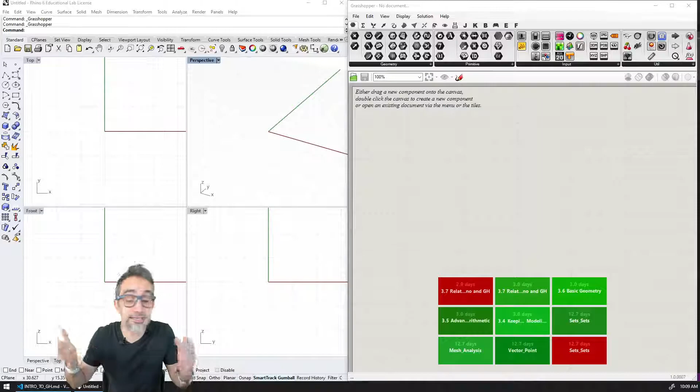Salvador, good morning. And Sotivas, yes, we're continuing with the introduction to parametric modeling series.

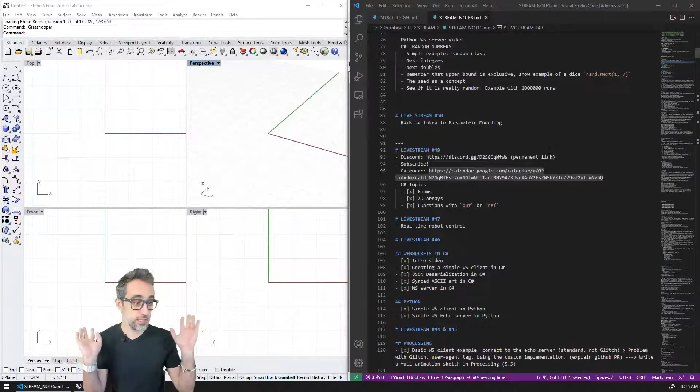Alrighty. And is that a good description, Nono? What do you think about that? I hope I didn't misrepresent anything.

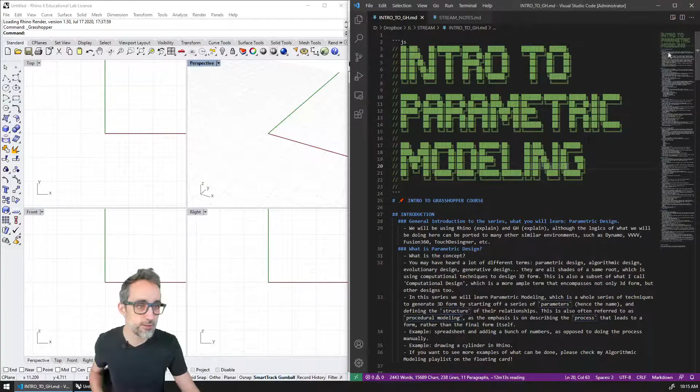Anyway, where were we? Yes, today, what are we doing? We are continuing with the Introduction to Parametric Modeling playlist. And I had a list of things that I wanted to cover here. So I think today we're going to start with Introduction to NURBS Geometry. How are we going to do that? That's a really good question.

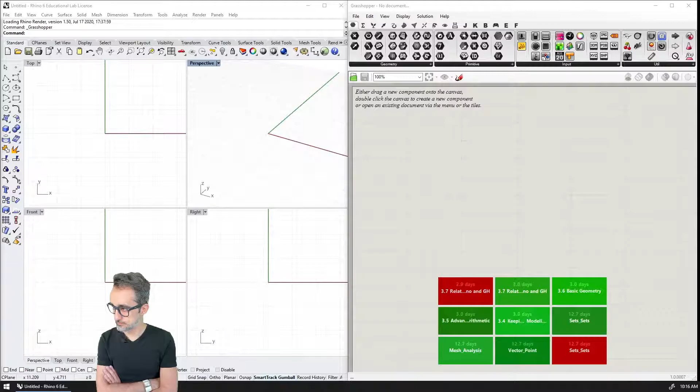Okay, so yes. So today we're going to do 2 live streams, one in the morning, one in the afternoon, and the one in the morning, we're going to touch upon NURBS geometry. So I'm going to be explaining what NURBS geometry is, how it works, the basic properties of things that you need to keep in mind. And then we're going to do a few exercises with lines and polylines and splines and blah, blah.

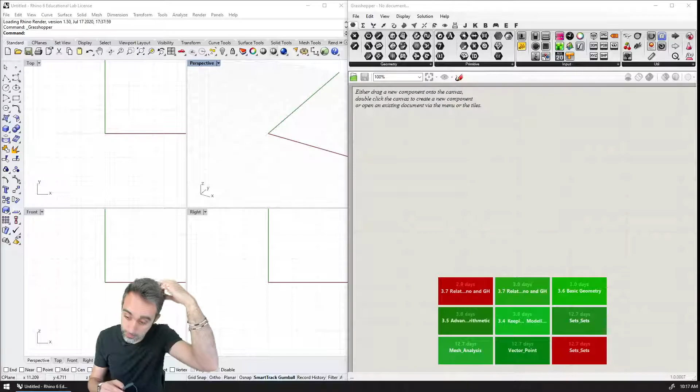We're going to discuss how to import geometry from Rhino into Grasshopper, which is something that we haven't seen yet. And then hopefully, if we have time, we will end up with NURBS surfaces this morning. But if we don't, then we will do that in the afternoon. So remember, we're streaming at 2 p.m. again today, 2 p.m. my time, so East Coast in the US. And in the afternoon, we're going to be doing a bunch of practical exercises.

All right. How does that sound? Does that sound like a plan? Are you excited? Can you give me a hands up? Choo-choo, choo-choo. Yes, I should not be drinking so much coffee before I do these things, because then things happen.

Okay, so NURBS geometry. What do I want to say about NURBS geometry? Well, I'm going to do some sketching here. So I will draw some stuff and I will explain things. But I probably want to start first by explaining or showing what NURBS geometry is. What are NURBS? Control points. Maybe this could be interesting. Wikipedia.

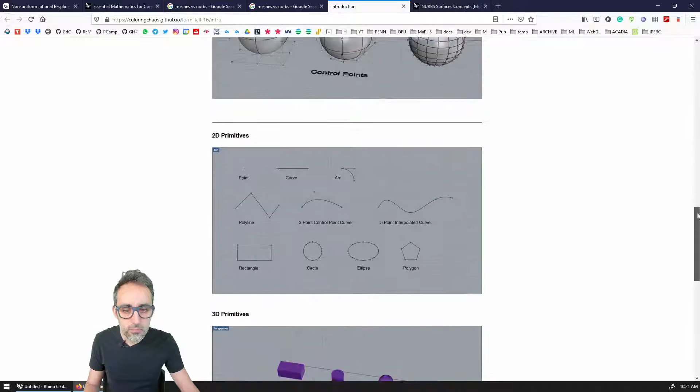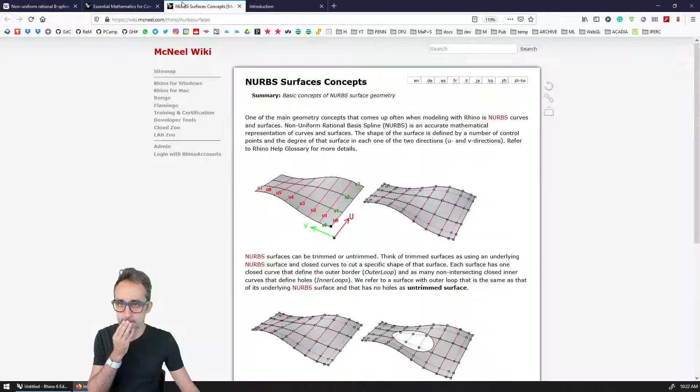Okay, so I think we can start this video. My first one is a little more theoretical, so it might be a little bumpy as we record this. I'm going to start with NURBS. Actually, this is a pretty nice drawing. I can probably use these drawings when I explain things. Meshes versus NURBS. NURBS surfaces concepts. I can probably show that later. Sorry I'm ranting a little bit, but I want to think this through before I start recording. Okay, let's just start.

Hi, this is Jose Luis, and welcome to this new video. No, let's start over again. Welcome to this new section in the playlist, the Introduction to Parametric Modeling series. Should I explain first as opposed to other forms of geometry, or Euclidean geometry? Let's just do it. Let's move on.

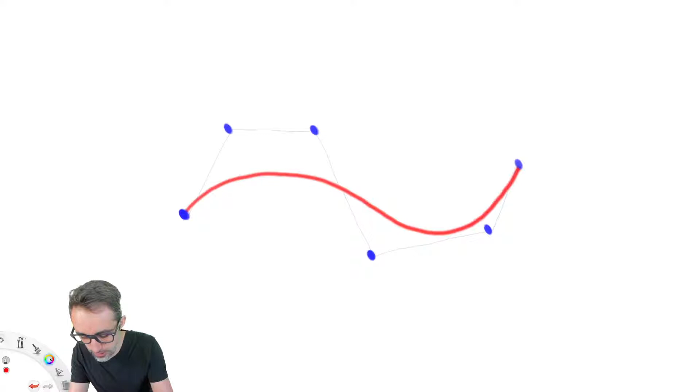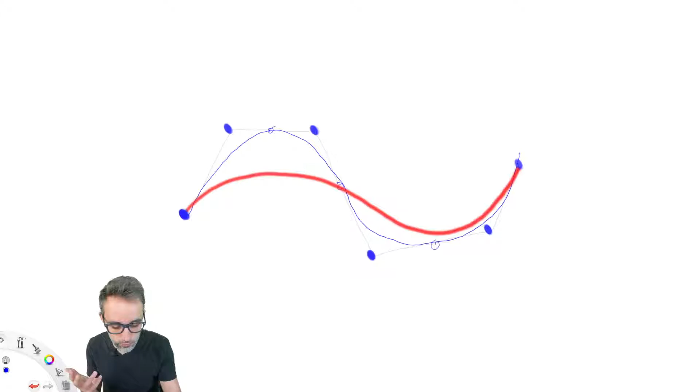And the degree of the curve gives us a representation of how smoothly that curve is going to travel through the control points. What it means in practical terms is, imagine I have this curve and this curve is degree 3. If I were to change the degree of this curve and make it degree 2, then we will have a curve that will snap closer to the control polygon, something like I have drawn there. And actually, because it's degree 2, each one of the segments will be tangent here to the control polygon, something that did not happen with degree 3. And each one of the segments will be a quadratic curve, basically degree 2.

Now, if we reduce the degree one more level and we have a NURBS curve of degree 1, it turns out that all the segments are polynomials of degree 1. And which geometry can be represented with a polynomial of degree 1? Well, it turns out that is straight lines. So a NURBS curve of degree 1 is basically a polyline. It's something that looks like this. All right? So the lower the degree of the curve, the closer or the more bound the curve is to the control polygon.

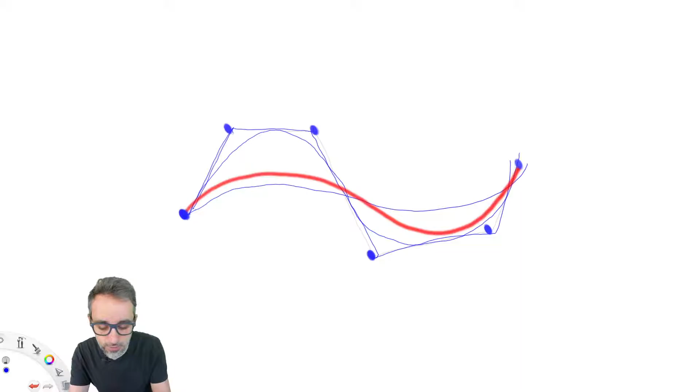Whereas the opposite is also true. If we have the red curve, which is degree 3, and then we increase the degree, then the curve will travel even more smoothly throughout the points. So a degree 4 curve might be something like this, and degree 5 would be even smoother, maybe something like this. Okay? So, as we will see very soon, if you want to play with the degree of a curve, the higher the degree, the smoother it will go through the control polygon.

You have to remember, though, that one of the rules of NURBS geometry is that you need one more control point than the degree of the curve. So if you want a curve of degree 5, you will need to have at least 6 control points in your curve. Otherwise, you just cannot generate that.

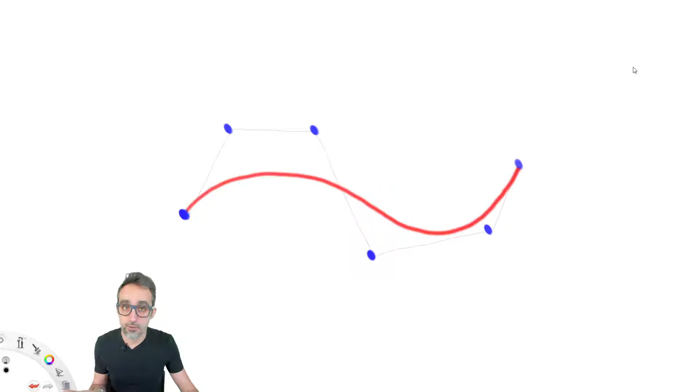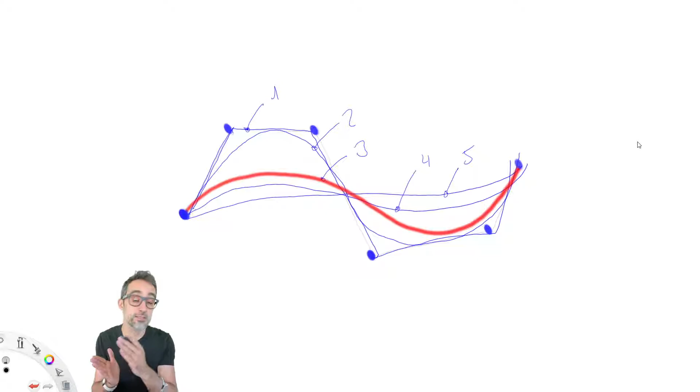And the last property of NURBS geometry I'd like to discuss, which is extremely important, is the domain of a curve and the idea of finding parameters, finding points across the domain of that curve. What does that mean? Let me turn off all these different degree curves, and let's stick with the main one we had, which was of degree 3.

What that means is, as I was explaining before, there is some kind of polynomial that the software is handling for us somewhere, which looks something like that. It depends on an unknown variable, in this case I've called it t, and yes those things are t's, my t's are a little special. It also has some other coefficients, a, b, c, and d, which are numbers we know because of the control points. So the control points define which coefficients we have in that polynomial. That equation, that polynomial, is the one that drives the shape of the curve, more or less. This is not exactly like that, but more or less.

The unknown parameter t is the one that defines where along the curve we can position ourselves. Because the only thing we don't know there is t, if we start plugging in values to the parameter t, for example 0, 0.5, 0.8, 1, 1.5, 2, whatever, and solve the equation, we can find the coordinates of a point along a particular length of the curve.

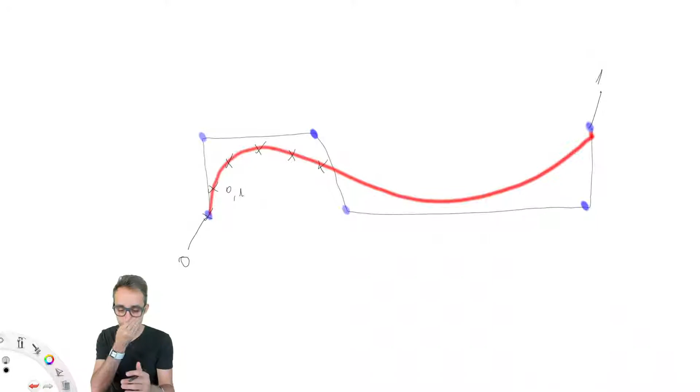Whereas if we keep going and ask the curve for a point at parameter 0.6, those points may start spreading out and getting farther from each other, as if accelerating over the curve. So this could be 0.5, this could be 0.6, this might be 0.7, 0.8, 0.9, and this would be 1.

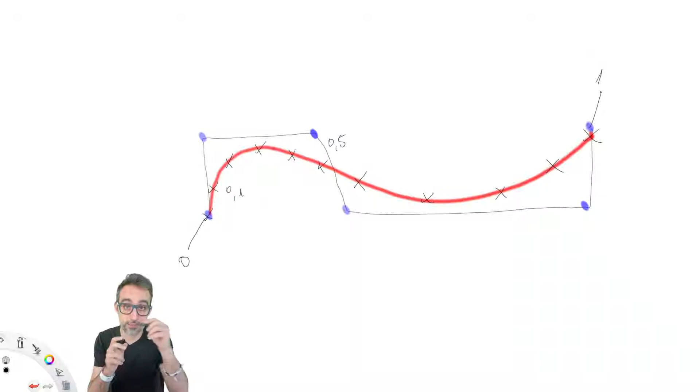So the bottom line is that the domain of a curve is not evenly distributed in Euclidean terms. The linear distance between those points—the chord segment or length of the curve—is not going to be the same, even though the distance in parameter space between them is the same. You can think of the domain as a number representing where we are along the curve, but it's not linearly dependent on the curve, and it has nothing to do with the actual length of the curve. It has to do with the distribution of the control points.

All of this will be a bit more clear in the next videos when I start showing examples of how this works.

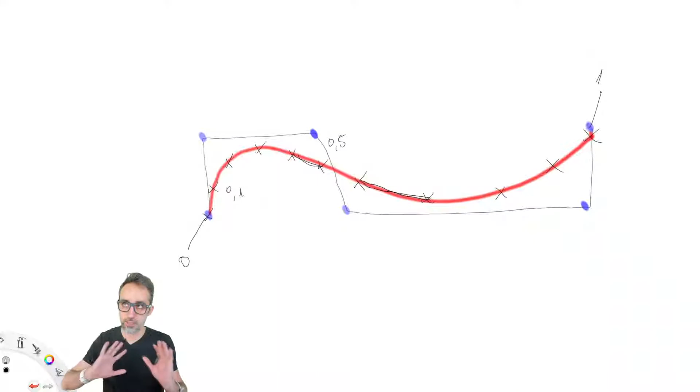Okay, I did like that one. So let's go back to what are we doing now? Control points, the domain, and the degree. So I have that, and I'm going to save this. Curves have knots and other properties, but I don't think they are very interesting myself, which might be a strong judgment call on my side, but I'm going to stick to that.

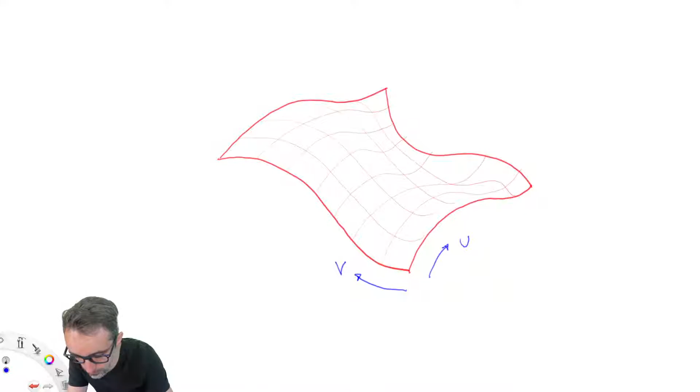Okay, so I'm going to do this. So that's going to be a surface, and I'm going to say this is going to be the direction. This is going to be direction U. This is going to be direction V. So any point can be represented, and if we do this with lines, we can also divide this in a way, kind of like that. So I can draw a point anywhere on the surface, like that. Okay.

Now, NURBS geometry has a few other properties, such as knots and other things that are perhaps a little less intuitive. For the purpose of modeling, I consider that they're not so interesting, so I'm going to skip over them to move on to other kinds of NURBS geometry that is not just curves, but surfaces. The idea is that all the properties and concepts I just explained for curves apply exactly the same to surfaces. It's just that instead of having one polynomial that defines the curve, I have two polynomials that define the curvature of the surface in each one of the directions.

So what does that mean? It means that when I have a NURBS surface, first of all, I have a cloud of control polygons like this, which define the overall curvature of the surface in both directions. What that also means is that I have two directions. Just like with curves, where I had one direction defined by the curve, typically referred to as t, for surfaces, the internal direction is referred to as the u direction, that's one, and the v direction is the other one.

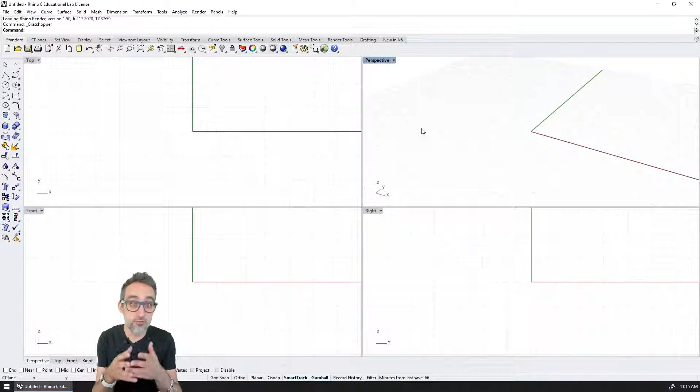Hi, this is Jose Luis, and in my previous video in this series called Introduction to Parametric Modeling, I explained conceptually why NURBS geometry is so interesting and what are the main properties that drive it. So in this video, I just wanted to do a few quick examples of how we can actually model in a 3D modeling environment with non-NURBS geometry and with NURBS geometry.

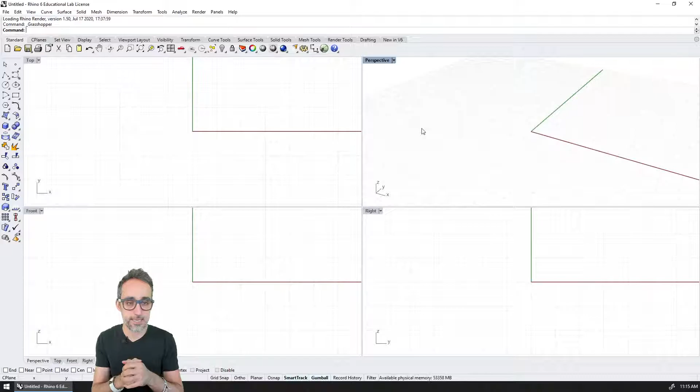So here I have my Rhino viewport. Rhino is a 3D modeling environment that is very popular among product designers, sometimes in architecture, and it is very well known for having a NURBS kernel that allows for freeform modeling, which is super interesting. I'm going to go directly to full perspective mode by double clicking on the perspective tab here. I can pan by doing shift and right click, I can zoom in with the right mouse button, and I can also rotate with the right mouse button.

So here on my tab, I can create points. I can create 1 point, and I can right click to repeat the action and create another point, another point, another point. And then I can take these points, and if you have the gumball option turned on, you will see this small local coordinate system that allows you to move the point in three-dimensional space. I'm just going to nudge it up a little bit, and now I have these 3 points in three-dimensional space.

I can also create simple lines. So for example, if I long click here, you can see that I can create single lines.

So that's going to be a line between 2 points. I'm going to repeat another line between 2 points. And then if I click on the line, I can move the whole thing. Oops, I can actually extrude it. But I can move it if you just click on the arrow. I can move the line in three-dimensional space.

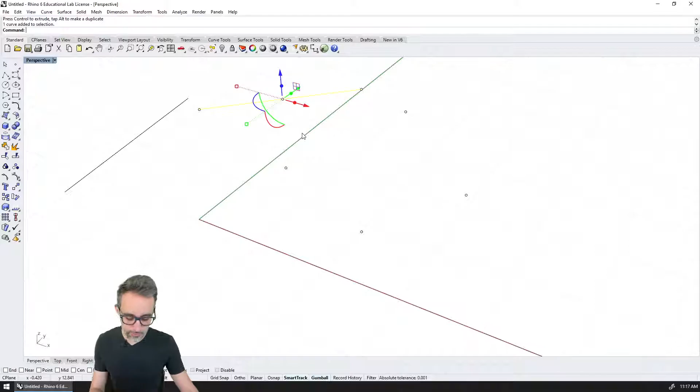And also, if I select the line and I press F10, I will turn on the control points for a line, and therefore I will be able to modify individually each one of the points. And now I have a line that is inclined in three-dimensional space.

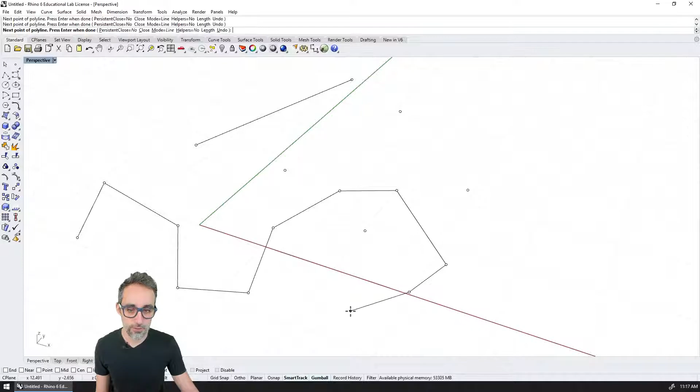I can also, if I long click, select polylines. So I can just click on a bunch of points and have this complex polyline show up. If I click on it, again, I can move it in three-dimensional space, etc.

But if I click on the line and I press F10, then I turn on the control points, and then I can start manipulating each one of them individually, which means that now I have given volume to what was a planar polyline before.

I'm going to delete all of this stuff, and now let's get to the good stuff. So I'm going to delete all of this, and I'm going to go here to splines, and to curves. And then you can see that if I long click, I have a bunch of options to create curves, but the first one is going to be a curve through control points.

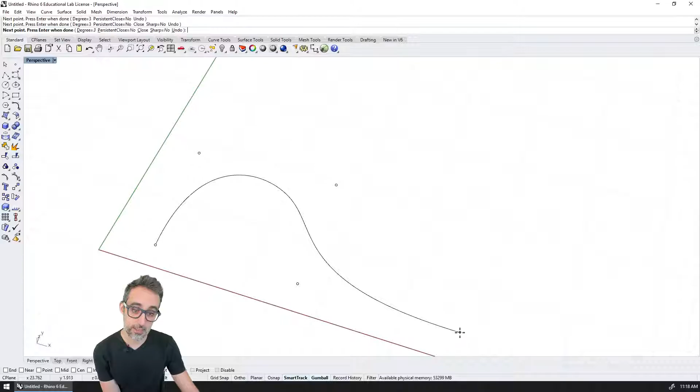What that means is that I can create a curve very similar to the one that I drew. What I'm doing here now is I'm clicking the control polygon, and I'm creating the control points of the curve. Right now, this curve is infinitely smooth, and no matter how much I zoom in, I'm never going to see any kind of discretization. Again, it's defined by a mathematical polynomial, so I can find any smooth point on it.

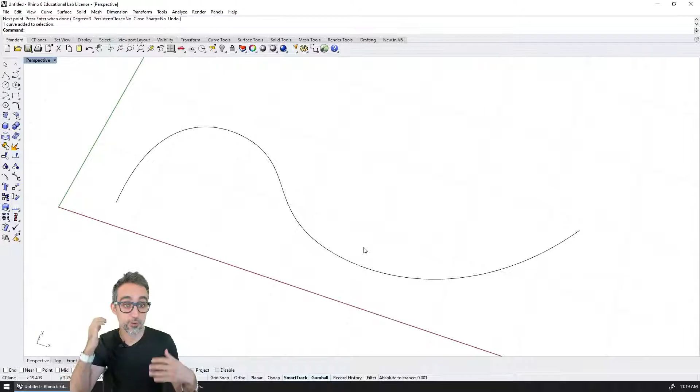If I click on it, you can see that the control polygon shows up, and the control points that define it also show up, which means that I can take this point, for example, and move it like this, and you can see how the curvature just adjusted between that and that, you see?

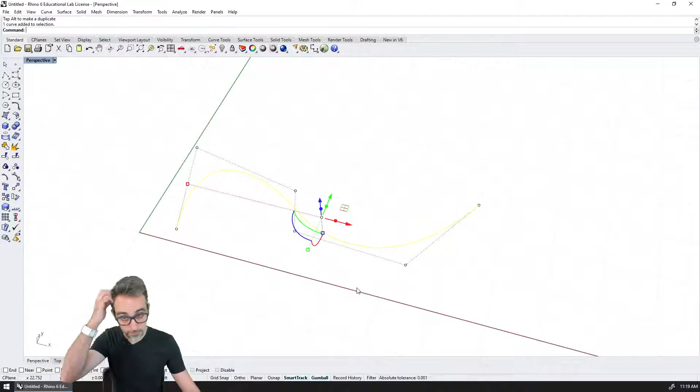Or I can just move this one here, this one here, or I can even move them in three-dimensional space so that the curve is not planar, but has some volume, you see? And then you can see how the curve is now a very smooth three-dimensional curve defined by the control points, right?

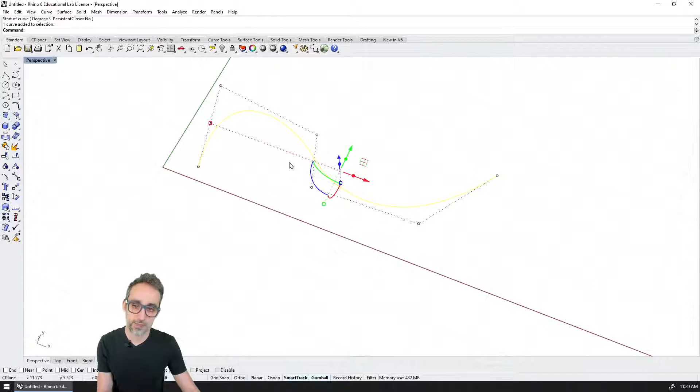Now, what if I wanted to change the degree of the curve? Well, when you click on creating the curve, you can see that before you start, it gives you the option to choose the degree here. And by default, it's degree 3. So let me see if I can create 2 curves. I'm going to create 6 points here.

And then I'm going to create a curve through control points of degree 3, and I'm going to snap to these points. So I'm going to make sure that I have object snap turned on here on the options. Oops, sorry, let me escape here. I'm going to turn object snap on, and click on point, so that when I click here, degree 3, I snap to this point. 1, 2, 3, 4. All right, so that was the curve of degree 3.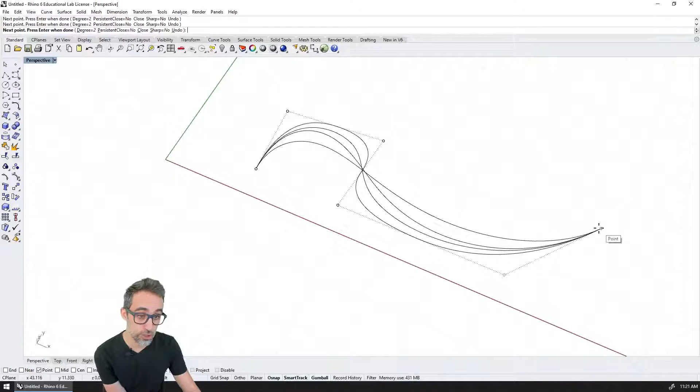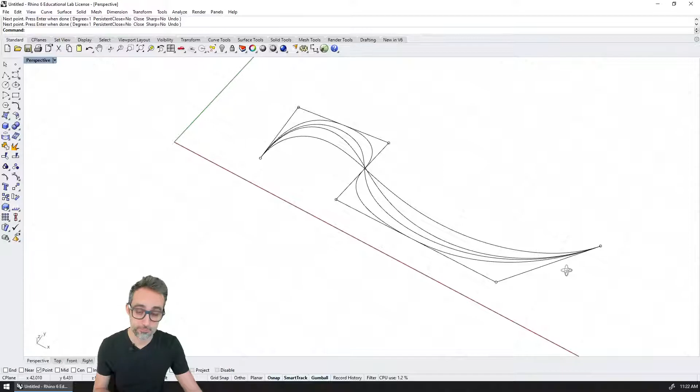What about degree 2? Let's do degree 2. And so this one, you're going to see how the curve is actually tangent to the control polygon at the center of each segment. It's actually touching at the center. And if I were to do degree 1, you will see how this will be simply the control polygon, because it will be an actual polyline. All right, can you see that?

Awesome. And now on top of this, there's actually other ways you can create curves. So for example, there is a very popular way of creating curves, NURBS geometry in Rhino, which is through interpolated points. What does that mean? Well, if you remember, for degree 3, 4, and 5, none of these curves is actually touching the original control points. And sometimes, for whatever reason, I may have a situation where I have points that I know that I want to go through. And therefore, creating a control polygon that is guaranteed to go through those points can be tricky.

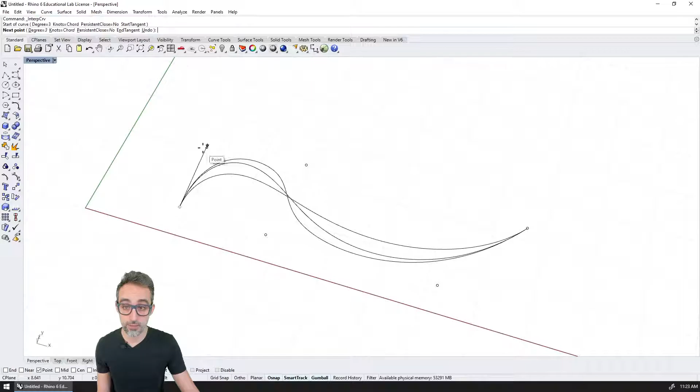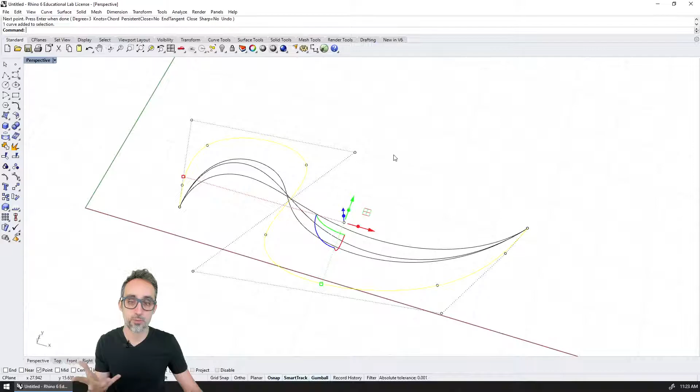So that's why creating curves using interpolated points is a really good way, because if I click on the points, with this method, I know that the curve will exactly touch each one of those points. However, if I touch, you can see that what Rhino has done is that it has created control points automatically at the places where it knows that if those points are the control polygon of this curve, then that curve will pass exactly through the points that I had specified.

So in a way, it's like creating the curve the other way around. So instead of giving it the control points, I give it the points that I want to pass through, and then Rhino will figure out what the actual control points of that curve are. All right.

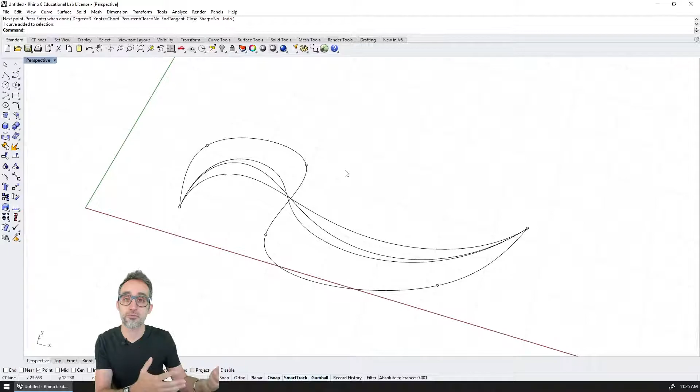And then the last thing that I would like to show is how to create surfaces. Because surfaces are defined by a cloud of control points, very typically we don't create surfaces by defining the control points. It's just very tedious. There's a lot of them. So typically the way we do that is by using operations that, starting from curves or starting from other primitives, end up giving us surfaces that have some kind of logic. And therefore, we also end up finding what the control points for that surface are. Very similar to the way we have created the interpolated curve here.

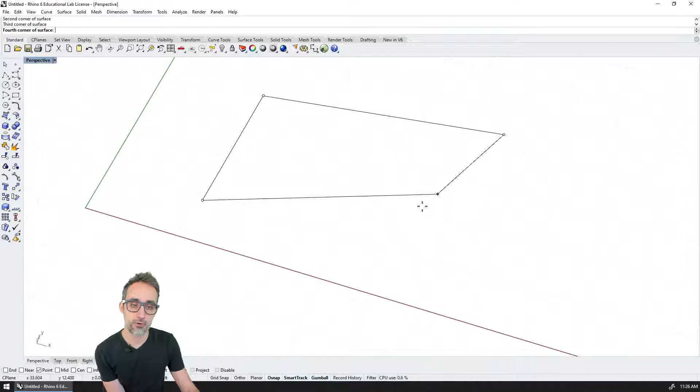So for example, I'm going to delete everything here, and I'm going to go to this panel and long click it so that we extend all the options. And you can see that, for example, I can have here a surface from 4 corner points. So I'm just going to create 4 corner points, all right? And if I right click here and I say ghosted, I can see a gradient, like a shaded representation of this surface.

If I click on the surface and I press F10, you can see that the 4 control points show up. This is a very simple surface. It only has 4 control points. But you can see that I can start dragging it. And now this surface has volume in 3-dimensional space and looks like a hyperbolic paraboloid kind of situation, right? So this could be a way of creating a surface.

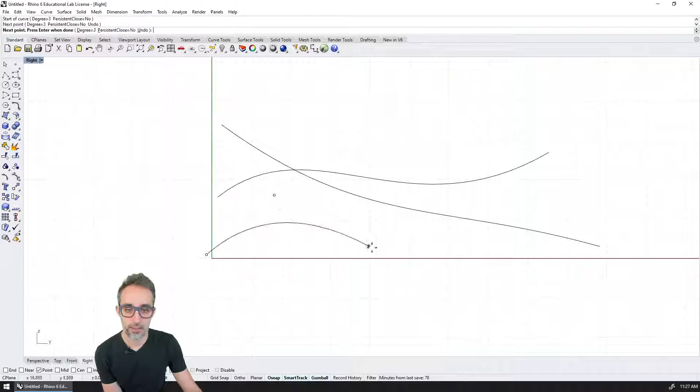Now, another very common way is by lofting a surface. So for example, I'm going to go to the right viewport, and I'm still using polynomial degree 3. I'm going to create three curves. Another one like this, and another one like this, for example. I'm going to right click. You can see that they're all in the same plane. So I'm just going to move one of them here and another one farther down. So you can see that now they look something like that.

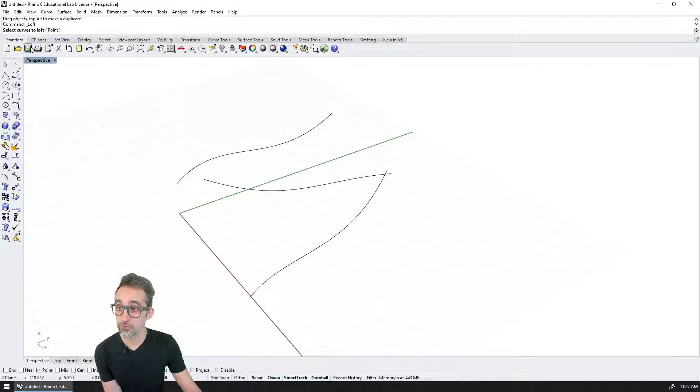And now what I can do is I can click here and I can click on loft, and I'm going to select the 3 curves, the first one, the second one, and the third one. And as I right click, you can see that I'm given some options, normal, loose, tight, whatever, but I can press OK. And by pressing OK, you can see that I have created a smooth surface that passes exactly through the 3 curves that I had defined.

And if I click here and I press F10, you can see that now I have this cloud of control points that define that surface. So in a way, it was a very similar process to the interpolation. I tell Rhino where I want the surface to pass through, and then Rhino calculates the necessary control points to generate that surface.

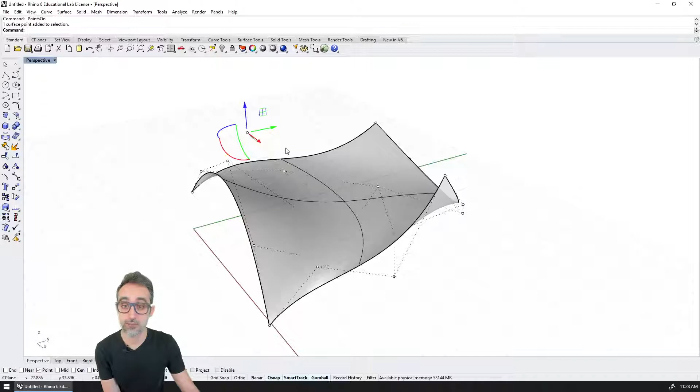And after that, I can mess with those points. So I can drag this point up, and you can see that the surface smoothly bumps up. And with this one I can also bump the surface all the way up here, and then the surface now has this bump here. The idea that by dragging and modifying the control points I can create smooth variations on the surface of the object is one of the powers of NURBS modeling, and one of the powers that make it so attractive for free-form modeling.

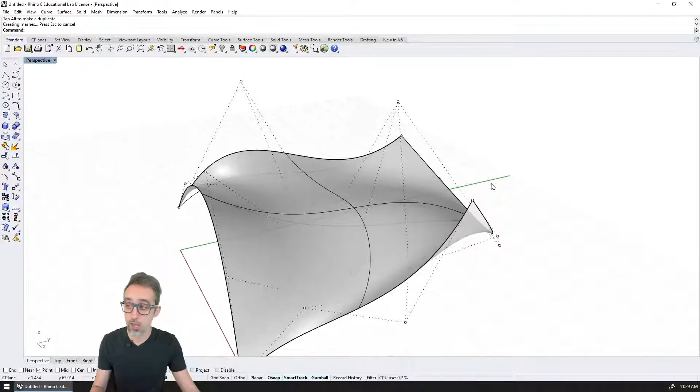Okay? So there are many, many ways of generating surfaces. If you long click here, you can see that you can do it with surfaces from a network, loft, from degree, from edge curves, from patches, with extrusions, point extrusions, you can do sweeping, you can do revolving, you can do a lot of things. But we will explain more of those in further videos in this series. Okay? So now, and of course, sorry, I forgot.

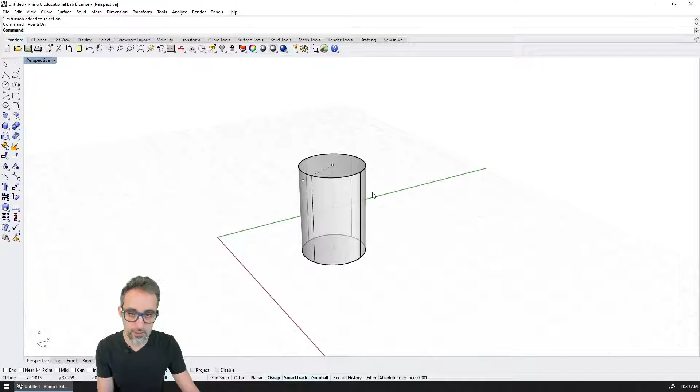We have surfaces, and in Rhino in particular, we have this thing called B-reps. B-rep means boundary representation, and what that basically means is that by stitching a lot of surfaces together, you can create something that feels like a solid object. So for example, I can create a cylinder here, and you can see that this cylinder is basically 3 surfaces. If I click here and explode it, you can see that it's one surface here, then the cylinder surface, and the other one here, right?

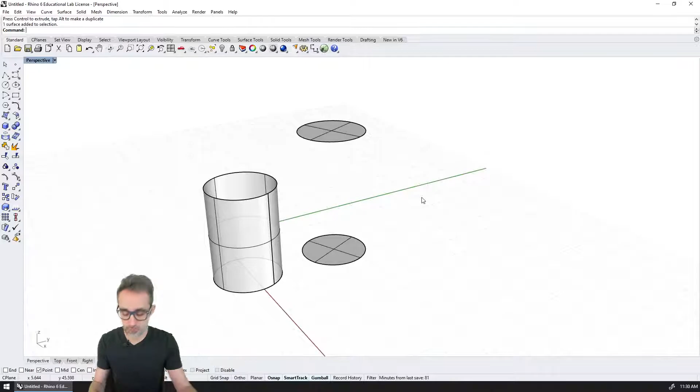So this is the concept of B-rep. A B-rep is just a collection of surfaces, typically enclosing a watertight space, a space that has no gaps. For us, it gives the impression of a solid object, but it's not really solid. It's just a bunch of surfaces together. You can do a bit more complex stuff, like a torus, which is actually one surface bent on top of itself. Or you can do a truncated cone, where you can clearly see it is again 3 surfaces stitched together.

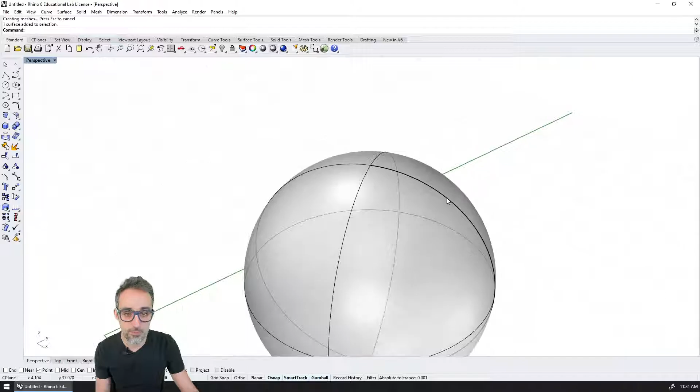Let me do a sphere, for example. If I generate a sphere, it will be this continuous surface wrapped around itself. As you can see, it is infinitely smooth because it's a mathematical sphere surface. If, for instance, I were to create a mesh, let's create a sphere primitive here and do the same thing. You can see that if instead of a B-rep object I create a mesh, the quality and the nature of the two geometries is very different.

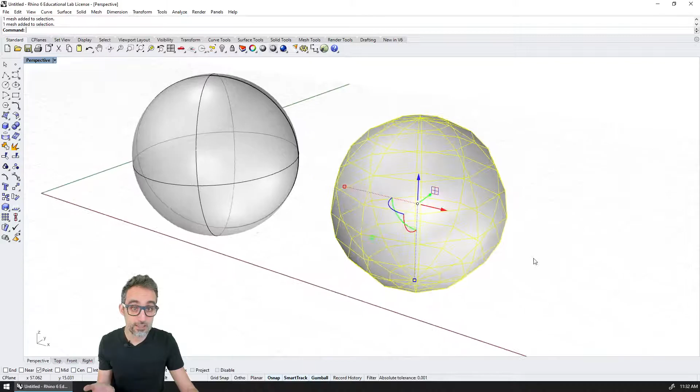This sphere is made up of a series of discretized faces, each one of them being a planar quad made out of 4 edges, and then these triangles here on the top. This is basically a collection of points and a collection of edges that join them together. It doesn't have any mathematical entity inside of it. It's just vertices and faces joining each other. I will explain a bit more of this further on in this tutorial series. Okay?

Now, I think this was enough for a modeling introduction to NURBS geometry. Let's take a look now at how we handle NURBS geometry: how, inside of Grasshopper, we can generate, create, and modify NURBS objects, which is one of the most powerful features the software has, and how it relates to parametric modeling in general.

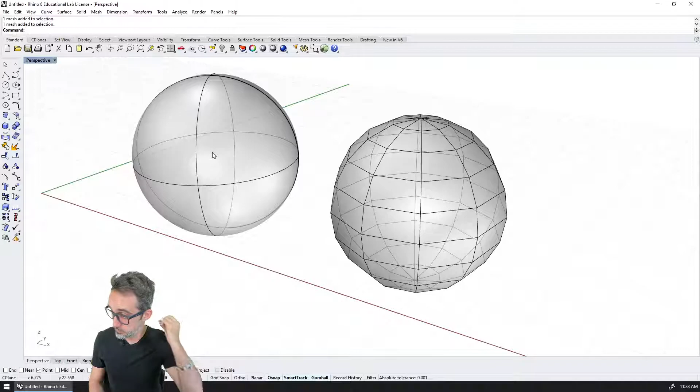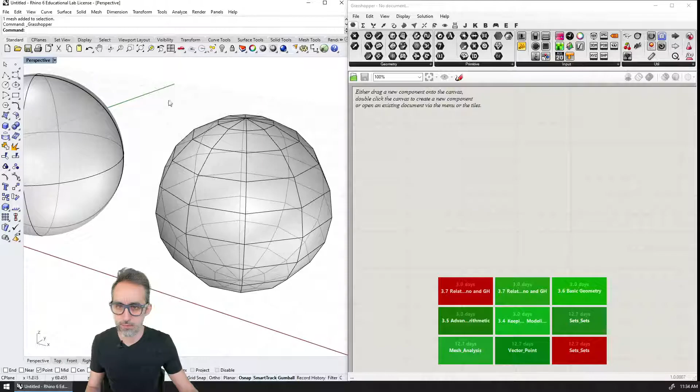Okay, so I think we can do the last video. That should be fast here. All right, so this was 4.1, this is 4.2, and now we're going to do 4.3 lines, polylines, and splines. Where do I start? Well, I start with bifocals, so that's one thing. And then the example that I'm going to do is I'm going to create 4 points, and I'm going to join them with straight lines, with a polyline, with a control point curve, and with an interpolated curve.

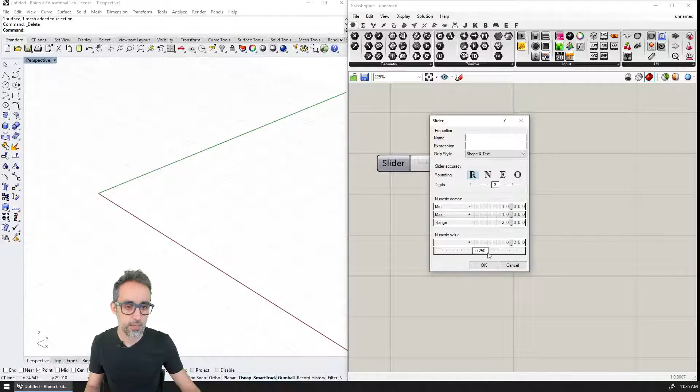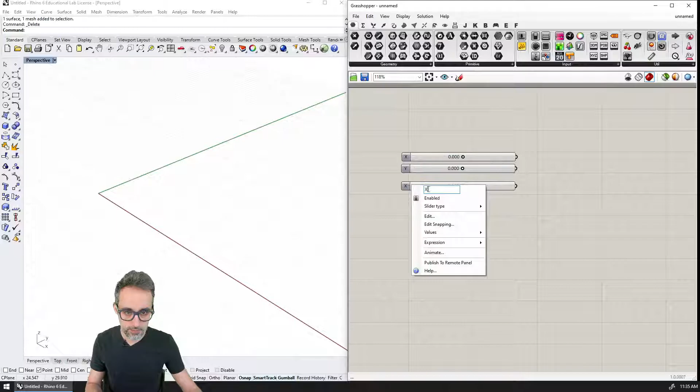All right, so I'm going to start with a slider, and I don't think we need to do this live. So here -10 +10, and let's set this at 0, for example. And this is going to be x, and I'm going to extend this a little bit, and it's going to be x, y, z. This is going to be y, this is going to be z, and then this is going to construct a point. And this is going to x, y, and z. Okay, so we have a parametric point here.

And I think I'm going to start there. 4.3 lines, polylines, and splines. All right.

Hi, this is Jose Luis, and in the previous video on this series on Introduction to Parametric Modeling, I explained NURBS geometry, what it was conceptually, but I also explained how to use Rhino, a direct modeling environment, to generate these types of geometry in the 3D modeling environment. Now, what I would like to teach you in this video is how to also generate NURBS geometry, but using the visual programming language Grasshopper that lives inside of Rhino, in a parametric way, so that all the parameters that drive that geometry can be controlled manually with our algorithm.

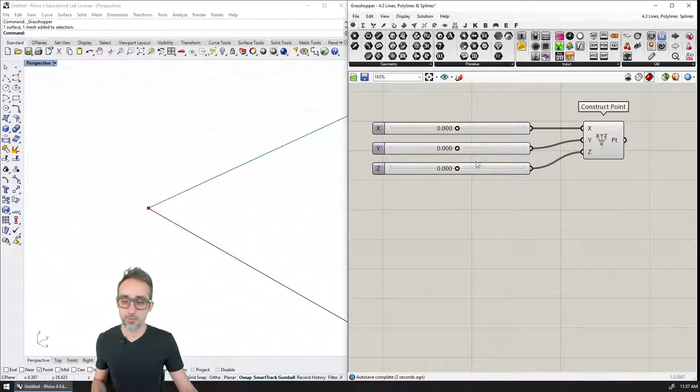So in this exercise, I'm going to create 4 points, and then I'm going to join these 4 parametric points with straight line segments. I'm also going to join them with a polyline, and then I'm going to join them with NURBS curves. One of them is going to be using control points as the input parameters, and the other one is going to be using interpolation points as the input parameters. Very similar to how I did in the previous video.

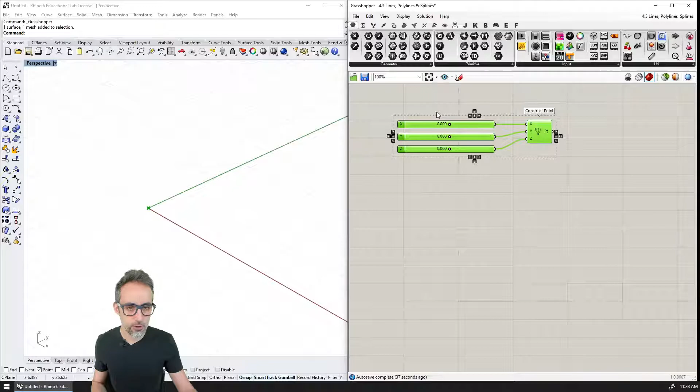So I'm just going to select all of this, and I'm going to copy paste it 4 times. So I'm going to create a second point, a third point, and a 4th point. And because you know that I like things to be neat and clean, I'm going to right away select all of these, press Ctrl G, and group them so that I can now move them around. If I right click here and type input parameters, these are going to be all the coordinates of my 4 points. You can see that my 4 points are all overlapping on 0, 0, 0.

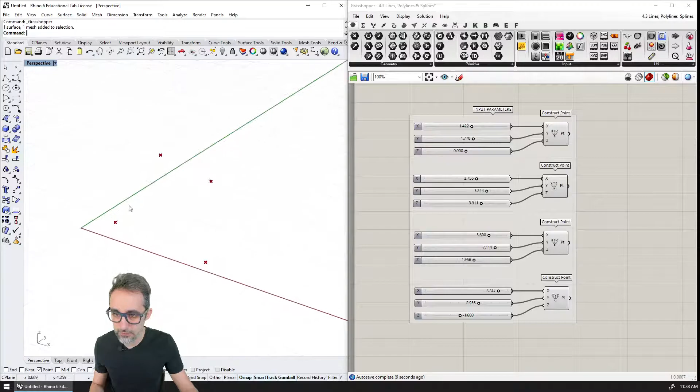So right now I'm just going to move them a little bit so that I can have a bit more of a 3D perception of where they are. And then here, this one is going to be all the way here, and it's going to be in negative. So you can see now that my 4 points are somewhere here in 3D space, and they form this kind of situation. All right. Okay, so let's start simple.

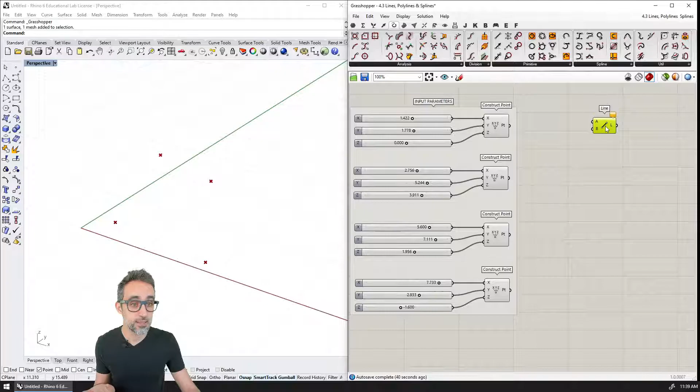The first thing we're going to do is join each one of these pairs of points with simple line segments. The way we can do that is if we go to the Curves tab, and if we go to Primitives, you can see that one of the first ones is a simple line between 2 points. So I can click that one and drop it on the canvas, and then I can say, well, the first input point is going to be point A, and the end point is going to be point B. And you can see that immediately I get a pre-visualization here.

As we have seen in previous videos, because everything is parametric, if I change the coordinates of the input points, I will change where the starting point and end point of this line lies. So now I can double click and drop another line component between 2 points, and the second line is going to start with the second point and end at the 3rd point. And I'll double click again, type line, find this one, and the 3rd line is going to start from the 3rd point and end at the 4th point.

Wonderful. I'm going to align these guys, distribute them evenly, and group them. This is going to be 3 line segments that join my 4 points. You can see everything is parametrically bound, driven by these 4 points that can be controlled parametrically and that define these 3 line segments.

Okay, this is great. Now these 3 lines are 3 individual line segments. But sometimes what we want, perhaps, is to have one single polyline that joins the 4 points I am parametrically modeling. So if I go to Curves and to Primitive again, you can see that somewhere, not in primitives, but in this case in splines, we can find the polyline component. Polyline, as you can see from the description, creates a polyline connecting a number of points.

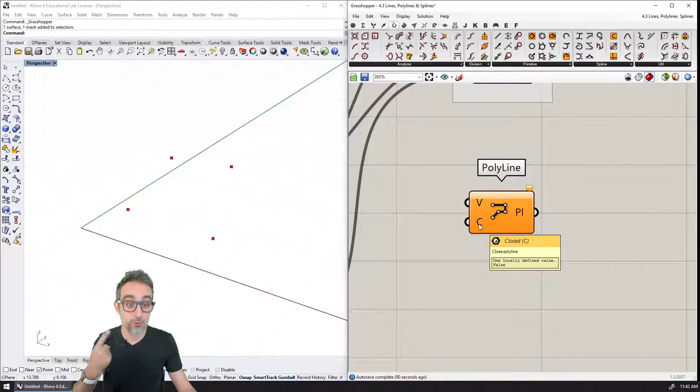So now what I'm going to do is use these 4 points to feed into the input of the component. The component has an input called vertices, and the description says it's a list of vertices, which means I have to plug in all the vertices in this same input. And then this has another input that says whether I want to make the polyline closed or not. This symbol, the circle with a half moon inside of it, means in Grasshopper terms that parameter is a Boolean. Boolean means something that can either be true or false. So I will show you how that works.

Okay, so in the vertices, we need to plug in the points for the polyline as a list. If I start plugging in the first one, and then plug in the second one, you're going to see that the second one snaps the first one out. And if I do the third one, you're going to see that it snaps the second one out. So this is not good, okay? Because what I need to do is plug them all together in here.

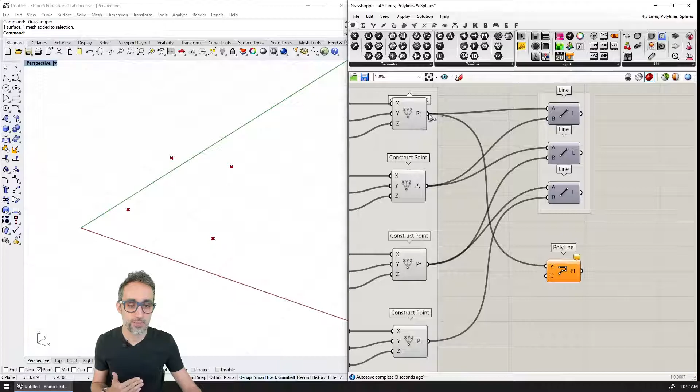So what I'm going to do is plug in the first one, and then in order to make sure that the second one also adds in without snapping anything out, I'm going to make sure that as I join it, I press the Shift button. You see how my icon turns into a green arrow and a plus sign? That means I'm going to be adding an input here. So I've added a second input, and as I press Shift, I add a third input, and here I'm pressing Shift to add a fourth point to the list. You can see that I have now connected the 4 points to the same input, which gives me a polyline object, a polyline curve coming out of this. And if I click, you can see that this all turns green. This component now has a polyline.

I may want to choose to close the polyline or not. Closing it means there's no open gap here, that it will always wrap up into the first point of the polyline. And I have to feed it a value that is true or false. So how do I do that? If you go to parameters and to inputs, you can see that just as we have sliders for numbers, for inputs we can have a Boolean toggle. A Boolean toggle is basically something I can double click to make true or false, true or false. And if I right click here, I can say, is it going to be closed? And then if I plug this in here, I can see that it's not closed, and now it's closed. You can see how this new segment shows up.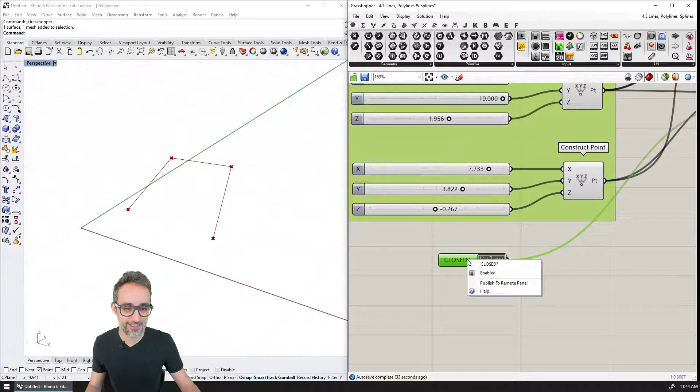So now I have a polyline, and I may want to bring my parameter here. I'm going to select everything and right click, making sure this gets added to the group. It's typically very good practice to keep everything that is a parameter, that is something you want to work with, at the left end of your definition, and everything that shouldn't be messed with on the right-hand side.

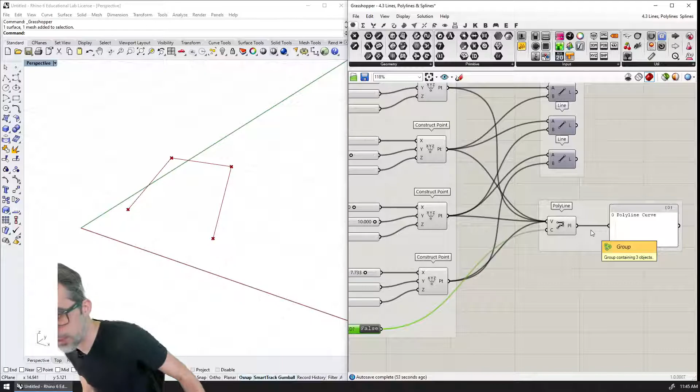So I have my polyline, and now I want to use these 4 points as the control points of a NURBS curve. The way I can do that is by going to Curves, going to Spline, and seeing that here I can create a NURBS curve. I'm going to click that, drop it in here, and take a look at the inputs and outputs.

This is a very good thing to do anytime you are new to Grasshopper. You want to take a look at the components and see what they're asking you for and what they're giving you. So for example, V tells me that I need the vertices, the control points, as a list.

That means I'm going to have to plug in here all the points. I'm going to do the first one, then the second one with Shift pressed, the third one with Shift pressed. Oh, I plugged it in the wrong way, so I'm going to do Control Z to undo. The third one here, and then the fourth one with Shift.

You can see that if I click here, this curve turns green, which means that this is the visualization of a NURBS curve that uses those 4 points as their control points. And of course, if I change where those points are, everything updates correspondingly.

Everything is parametrically bound. Let's take another look at more inputs. If I look at D, it says that it's the degree of the curve, and the degree has to be, according to the icon, an integer value, a number with no decimal part. NURBS curves cannot have a degree with a decimal part—it has to be an integer. So how do I do that?

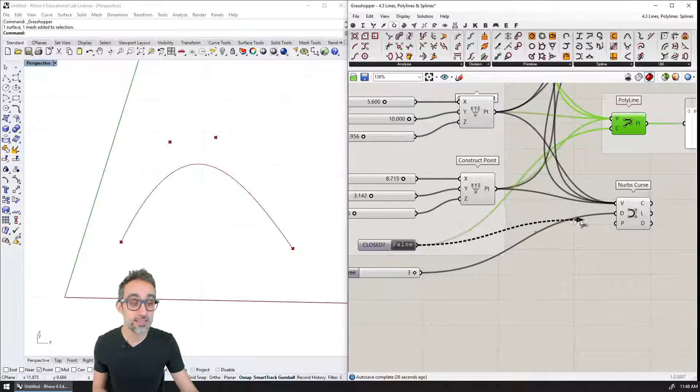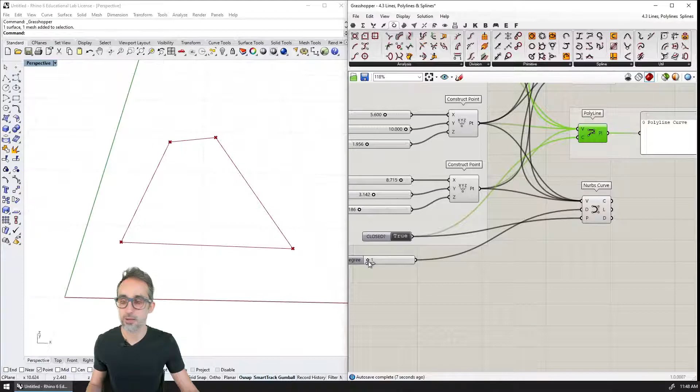we can plug this same input here and say, do we want to close? Yes—so this is a closed NURBS curve on these 4 control points. And look, if I do degree 2, it actually becomes tangent to the control polygon. And if I do degree 1, it just becomes a closed polyline. And if I open it up, then it goes back.

And then for outputs, we have the resulting NURBS curve, and the icon is a nice NURBS curve. L is the curve length, which is apparently 11 units in Rhino space, and D is going to be the domain. Turns out this curve happens to have a domain from 0 to 1—this is actually really rare for curves, but yes.

So we can plug in a few more panels here—this is the length, and this is the domain. I'm going to align and redistribute, and this is a NURBS curve. Okay, so this is very interesting.

The component is not only giving us the curve, but a lot of information about that curve, which could be useful down the road for other operations.

Last but not least, let's take a look at using these 4 points to construct an interpolated NURBS curve. The way we do that is I can go to splines and go to interpolate, which creates an interpolated curve through a set of points. I'm going to drop this here, and you can see I have a lot of stuff now.

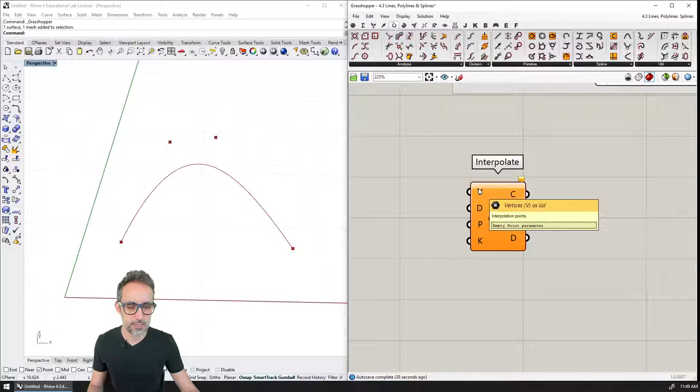The input is the interpolation points, so I'm going to plug in my vertices. So 1, and then the second with a shift, the third pressing shift, the fourth pressing shift, and you can see the curve has appeared and is going through all the points.

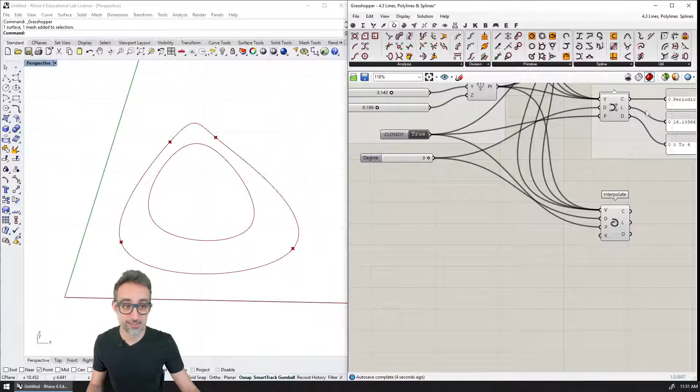Then P is whether the curve is periodic or not. We're going to plug this in, turn it on, and you can see how the curve does this. I'm going to turn the other one off. You can see how the interpolated curve does this weird egg-shaped, kinky thing here, which is kind of interesting, actually.

Oops, where am I? Oh, I got lost. Oh yeah, it does this weird twist because of how the points are in 3D space.

And then K is called the knot spacing, which is a way of - this is very difficult to explain - distributing how the domain is distributed across the NURBS space, more or less, but not really. Anyway, if you want to control this, you can add a number so that you change the type of knot style to uniform, to chord, or to square root chord.

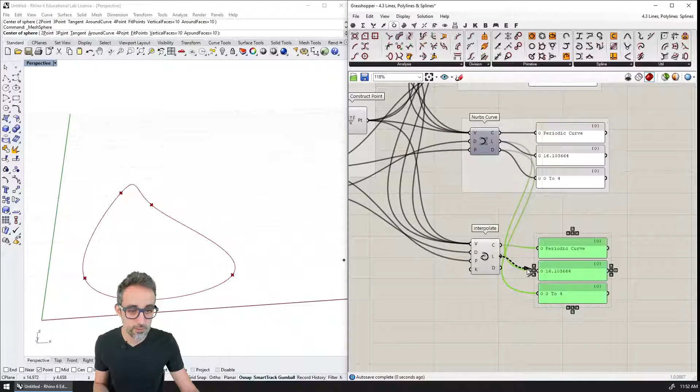The outputs are going to be, I think, pretty much the same. One is the curve, the other is the length of the curve, and the other is the domain. You can see that the domain now is from 0 to 4 point something.

Okie dokie, so these are the 4 ways we have of creating curves. Between 4 points, we can create straight line segments, we can create polylines, we can create NURBS curves from control points, and we can create NURBS curves through interpolation over those points.

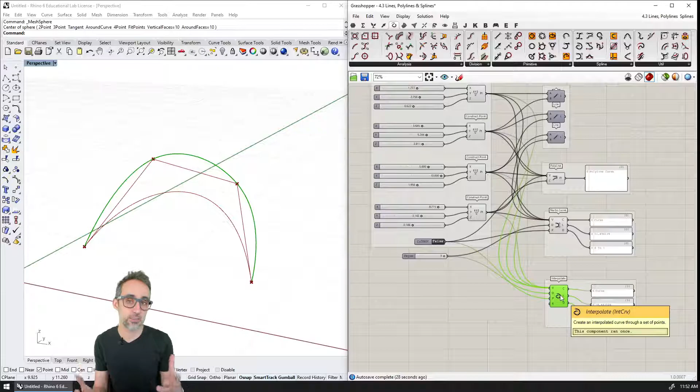Wonderful. So this is great, and I think this was a good introduction to simple generation of curves in Grasshopper.

Now, what I'd like to take a look at in the next video is, for example, having these 4 points in Grasshopper might be a little tedious, and sometimes working with coordinates can also be tedious. So I'd like to show you how, instead of using parametrically generated geometry as inputs to generate form, to create actual geometry coming in from Rhino to generate form. Stay tuned for how to import Rhino geometry into Grasshopper.